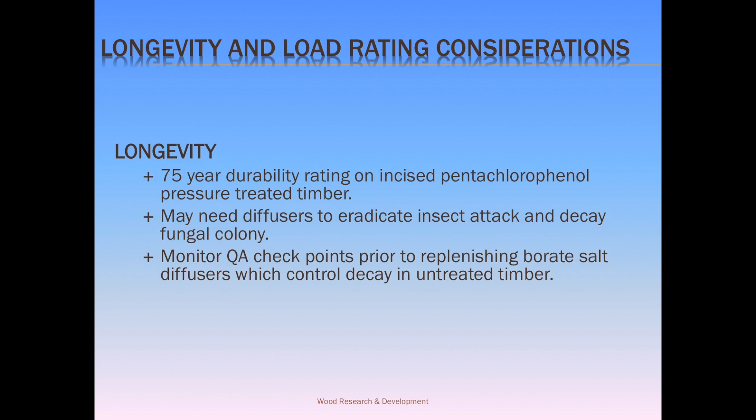Longevity. We say timber doesn't last. That's the mantra. Timber doesn't last. But I tell my students, I say, wait now, we've said timber doesn't last, but the average age of a bridge in America is 82 years. What's the average age of a concrete bridge? 42. So timber doesn't last.

We say timber doesn't last, but timber is the biggest sequestered carbon block in the world today in our homes in North America. The biggest sequestered carbon block in the world is our homes, because they're all stick built. So you see, really, it's about not knowing, isn't it? When you don't know, you don't know. And that's the simple of that. So we have this diffuser opportunity to extend life. We have monitor control checkpoints to check them regularly at the ground, what we call hot zones, and that allows us to extend life.

And this is the big one for me. 22 times less energy to build a timber structure than a steel structure. 22 times less energy. 16 times less than our reinforced concrete. And timber is so great because what? The trees are renewable and they pull CO2 out of the air. It's our roots, see? Timber's in our roots. Simple. So that's the way we roll.

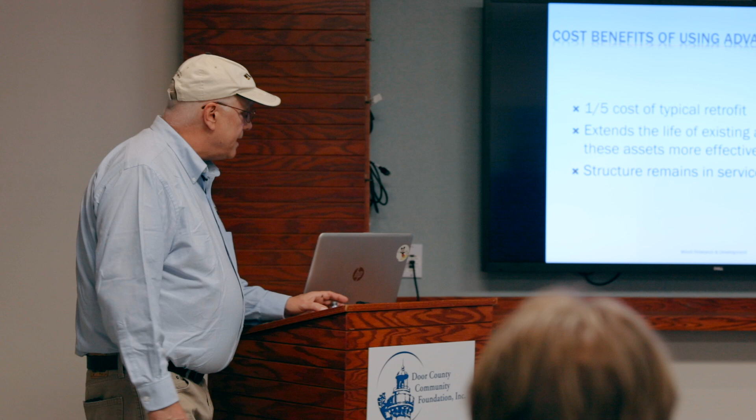A fifth the cost typically to retrofit. A fifth the cost. I'm not telling you what this costs yet. It's going to be the end. You got to stay. You'll be really sick of me by the end of it.

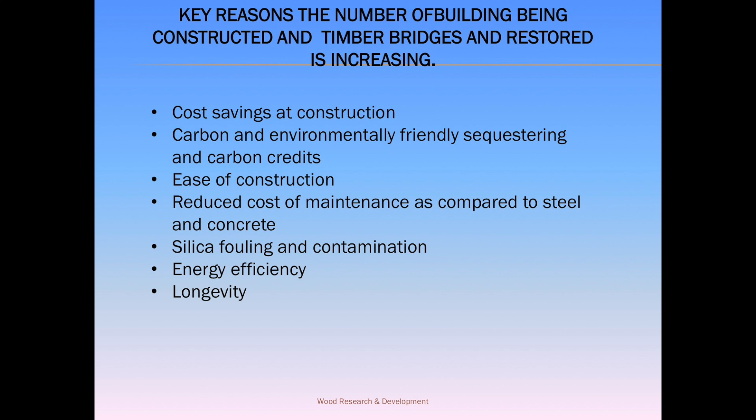You see here. So we got a summary. Cost savings at construction. Carbon, environmentally friendly. Ease of construction to fix it. Reduced cost of maintenance downstream. These are the reasons today that we're seeing buildings and bridges be restored and built with timber.

The average moisture content in a bridge or an outdoor structure in this country is 13 to 14% or 16%. Wood does not decay until it hits 22%. Why is decay 82% of all timber structure degradation? It's the connectors. It's where it's connected.

And one of the great things about the tower is all of the guy wires that are there are fastened to the piles with hoops that go around the column. When I looked at that in the picture, I said right away, gee, what a blessing that is. Because oftentimes they go straight through the column and the water goes in that and gets in the middle. And these have hoops. Another reason the tower is still in great condition today. You see, there's a reason for everything. And if you understand those reasons, you'll be better at your job.

And so this species that we have here in the columns is called Western red cedar. It's 0.33. It's 1/3 the density of water. It's very low density. Not as known for its strength. What's it known for? Longevity. They could have had white pine from local, but they chose Western red cedar. Why? Because white pine hasn't got near the longevity that Western red cedar has.

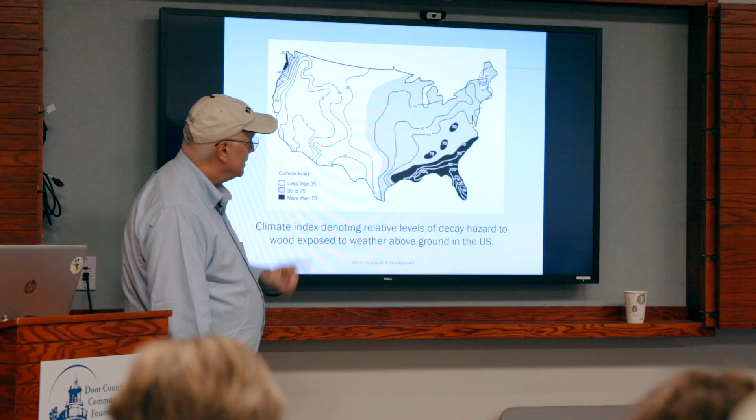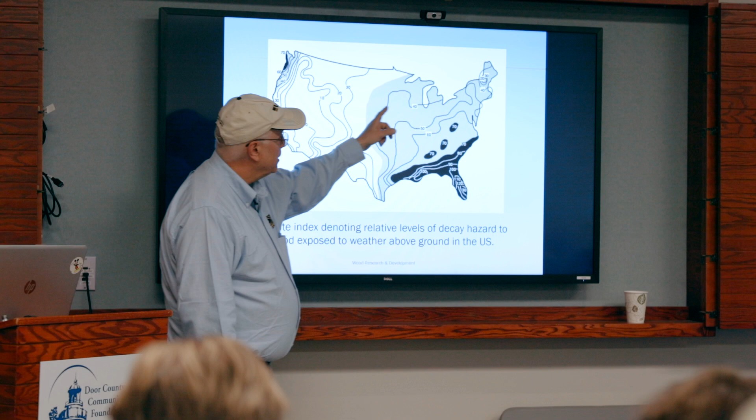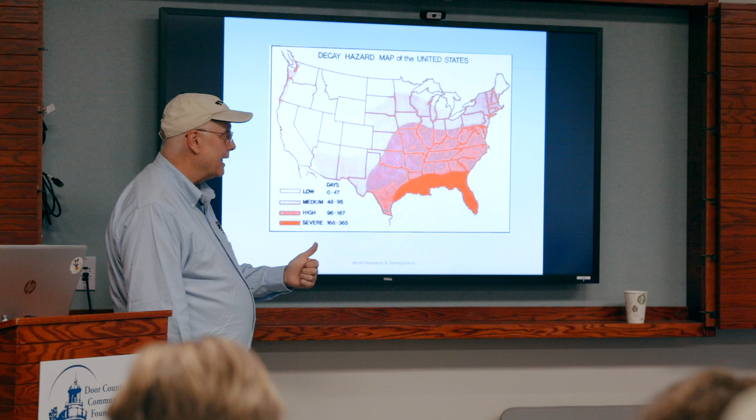This tower, what would I do with this tower? So here comes this tower. Look, 1929, 1931, built, $500. Can you imagine building that tower for $500 today? Money was hard to come by in those days, and the tower represented a great way forward for the people in a community as it provided a way to look out over the beauty of the land beyond all obstacles. If you were going through the Great Depression, to be able to get up a tower and look at distance would have been a great blessing. Because your problems would have been crowding you pretty bad, wouldn't they?

And so to be free to see and to dream, much the same way as the people of the day gained strength. The engineers don't like to read this stuff. I know they don't, but I like to put it in there. I'm a sucker for timber. So people gained strength to face the day, face the future, seeing how things would go beyond the days of the Great Depression. The community persevered through world wars, economic booms, busts, as the country grew. During all this time, the tower also persevered. No maintenance, poor maintenance, you name it, it persevered. It stood the test of time.

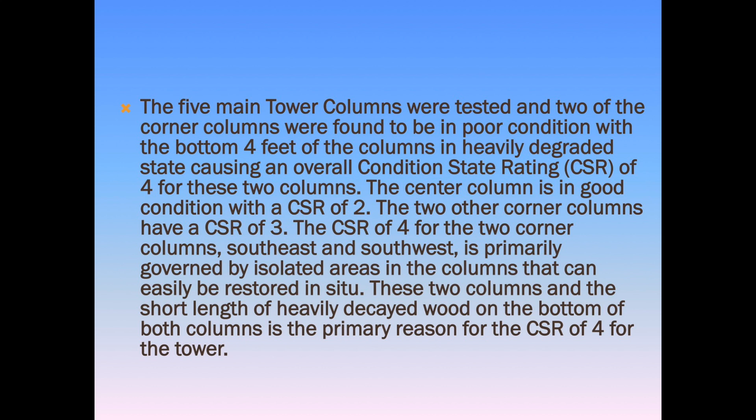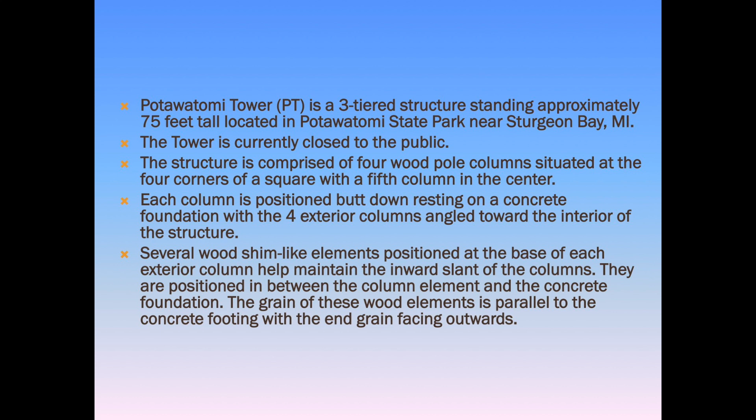It's a 3-tiered structure standing approximately 75 feet. The tower is closed to public right now, as I found out today. The structure is comprised of 4 wood columns that were not randomly picked. They were not sawn. They were round. They were cedar. They knew what they were doing. It was chosen for a reason. They had collars that went around them, not through them. They did it for a reason. They chose white oak treads for a reason. The tower just didn't happen by accident. It was there for a reason. That's why it's here today.

And underneath each of the column corners, there's shims to make it point inward. The one in the center is lifted up to let it breathe. The stairs wrap around the central wood column to provide access to 3 observation levels, the first at 25, then 50, and the 75. The top observation level is open with handrails and used as a viewing platform. The tower is located in the top of Government Bluff limestone quarry. It provides excellent views of the state park in the state of Wisconsin.

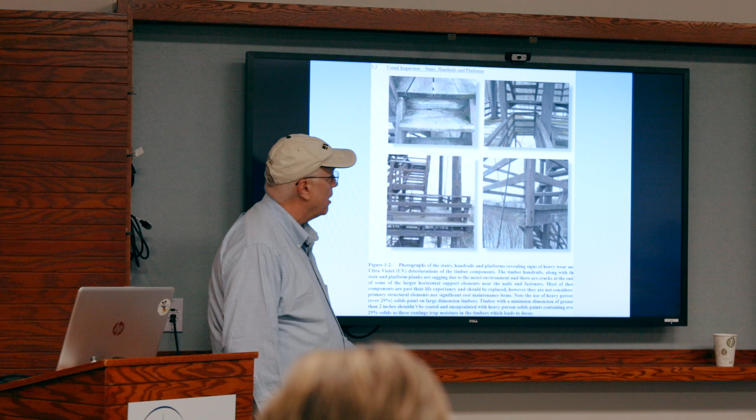So we look at it here, you'll see photographs of stairs and handrails in here. You can see them by looking through here. Some of them painted. The outside corners on the stair rail kind of settling. You can see some of these guys getting decay. You can see the verticals in here. These sorts of fix-ups in any tower are called minor maintenance. As you can see in here, here's the collars instead of going through them with the guy wires. You can see they painted it, wouldn't have done it.

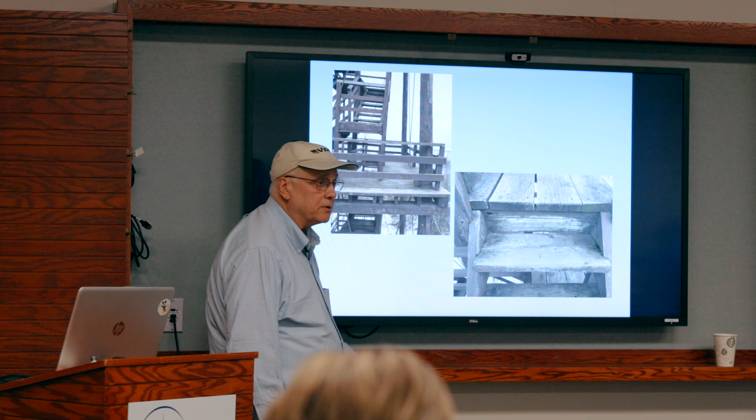When I had my way, I'd walnut shell blast it or acrylic bead blast it and then stain it with a stain less than 28% solids, Cetol 1 and then Cetol 23, and that wood would brighten up and you guys would have to put sunglasses on when you're around it. It would be beautiful.

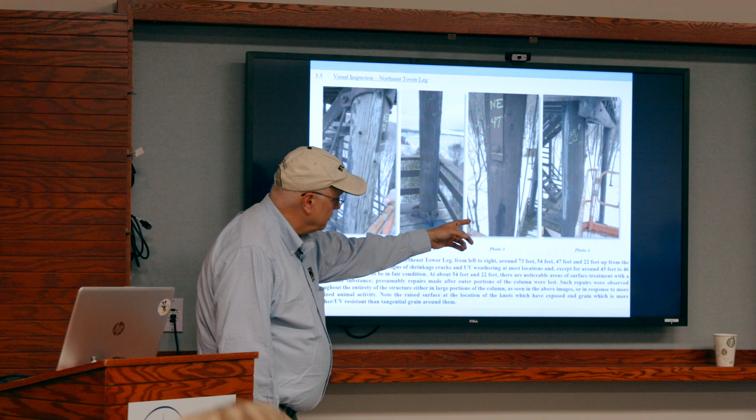As you can see here, you look at that and you say, that guy's had it. There's some UV weathering there. It's kind of lost some section around the knots. It's got some shrinkage cracks around it. It kind of looks old. And the first thing you think of is toast. When we do the internal non-destructive testing, it isn't toast. And so you can see there are places that are toast. My little girl could pick that one out. I don't have to be a rocket scientist to figure that one. But these decks and rails and systems can be easily restored. It's not a big bill. And we can take that plywood down.

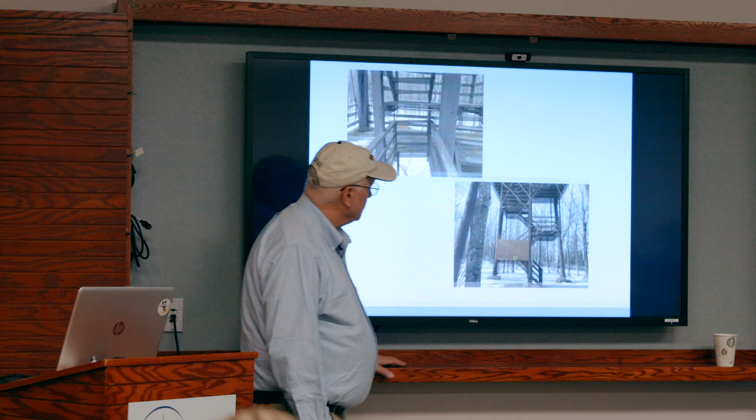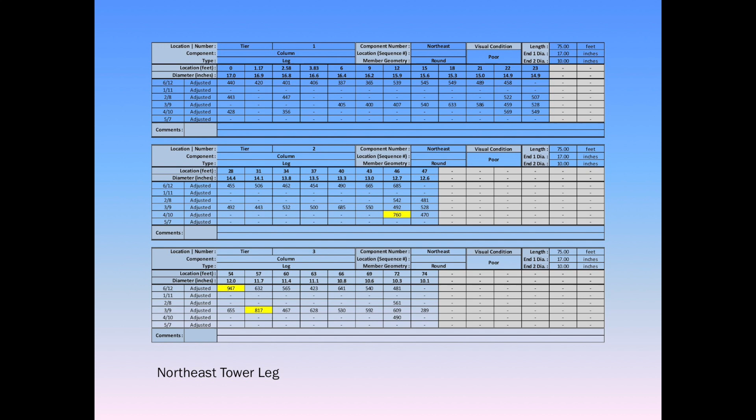And you can see here the big 4 columns going. Look at that, guys. Now you know why I went through the first of it, didn't you? But you're thinking, this guy sucks. He put me through all these damn slides. What's he up to? I want to go home and feed the cat. You're like, come on, what's wrong here? Look, this is it. Now you know. When you looked at the previous ones, all the reds and yellows, there's no reds and yellows. That's what I'm saying.

But look at that. Come on, man. Yeah, there's a bad guy right here, but he's isolated. You can get him. Look, there's some at the corner. Look here, but very few yellows. Yeah, you can fix. Look, they put tar on it. I don't know if some of you guys are responsible for that. I'd never have done it, and I'd get it out. Let the wood breathe. Don't coat it. Don't tar it. Let it breathe.

I say to my wife all the time, when I'm on one Saturday and I want to work out in the shop, I say, let me breathe. She'll come out and say, I got this big list for you. I haven't seen you for a week. I want to do this, this, and that. I said, honey, come on, I got to be able to breathe here for a minute.

That's what this wood does. It needs to be able to breathe. Look, a few reds.

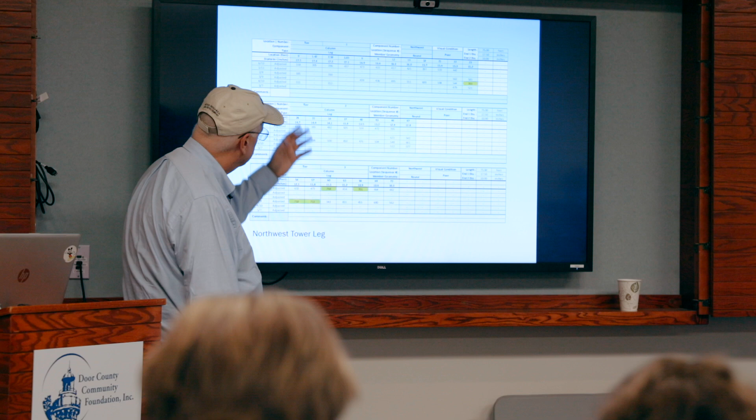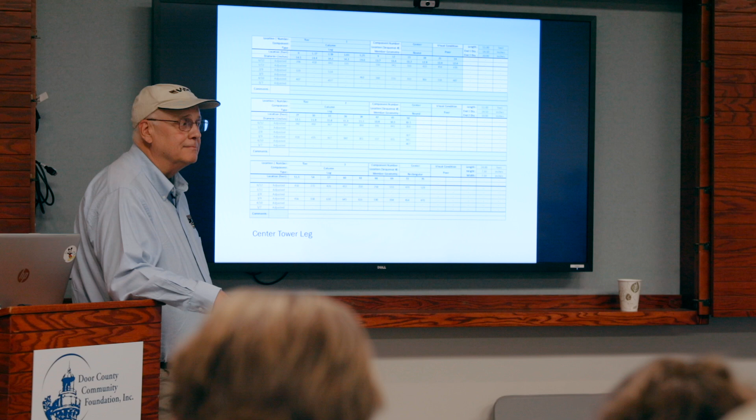These guys here, you're looking at them and seeing this and you're knowing why it's got, look. Northwest tower. You know, that's it. Look at that one. The center tower leg has no decay in it. The one they singled out. Cut it out. None. There's no decay in it. Why is it shut down?

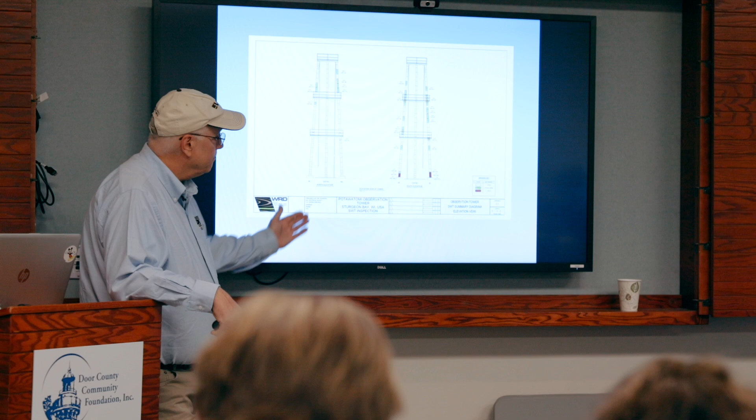It's got a few weak links, right? It's that analogy I told you, right? You're hanging from the steel chain. Don't take the average, you got to take the least. But go fix that steel link and then hang from it. See here? That's what it's done when you put it graphically and we drew it out. You can see right off where the bad ones are, right? Go fix them.

So analysis of cores revealed specific gravity. That's the ratio of density of wood to density of water. It was Western red cedar, highly durable, as you can see here. These southeast columns, they got some voids in there, which we found. And as you can see, this tower can go the distance to be able to be restored. This is the cores the guys took from it. So we know what we're doing.

We identified them under microscope and followed the proper keys to identify the species and its grade, and put together an in-kind repair strategy like this for the element. This is an advanced fiber. We gave a couple of options. And here is the design. Hot off the press today. I was over there working at the B&B, putting this into the PowerPoint an hour before tonight. So nothing like just-in-time strategy.

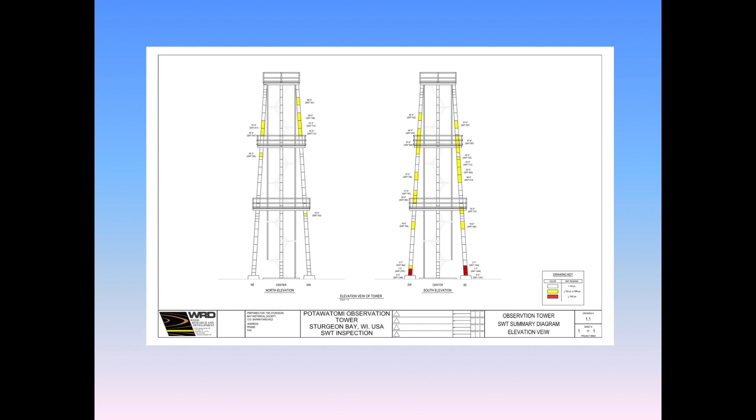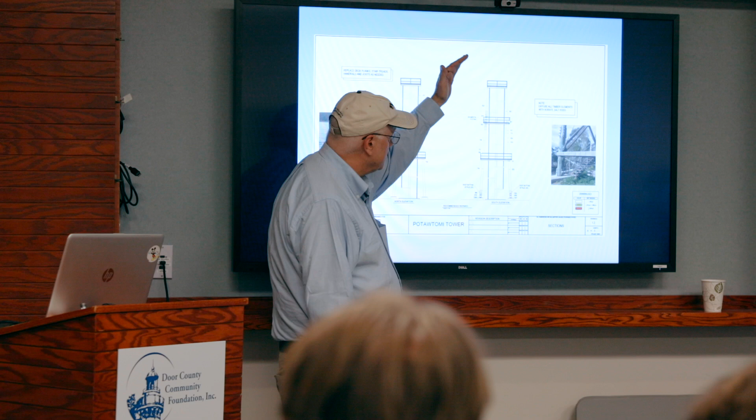You can see this is the specifications page. This is the replacement requirements page here. You can see this is the drawing showing the posting detail here. We'll take care of this guy here with a typical posting detail where the reds are. How do we do that? We support the tower with guy wires. We then turn around and cut it, put in another one. There's a specific design characteristic. You see that space in there underneath it? And we'll post that piece.

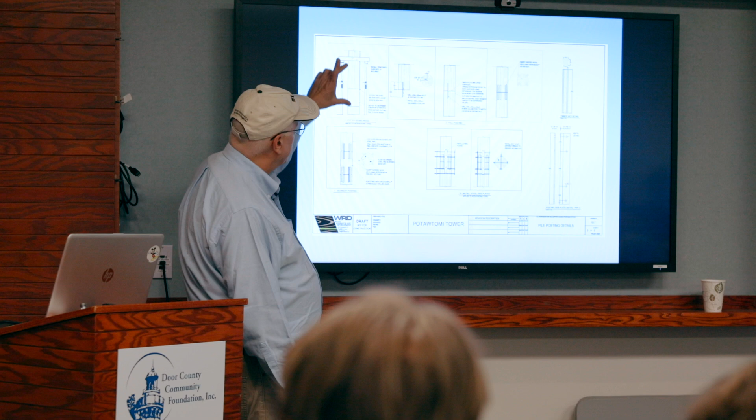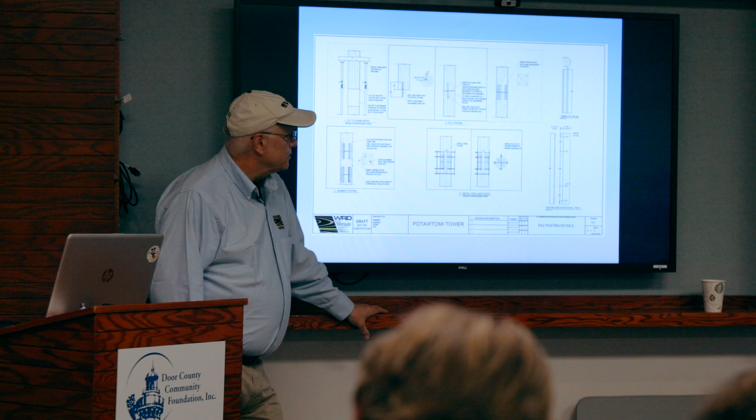You can see samples here. And this shows you how it's done. We hold that column up. Then we take a section out, put another section of Western red cedar in with a specific design detail here, and put it in action. Now, if you've never had any training in timber design, you probably won't know what to do here. But I've got the odd one done. 1,350 to be exact. So you can see here, this is the cost.

You're seeing it for the first time. Not even your buddy Sean has seen this. I can't see it. You can't see it. That's what my wife says all the time. Okay, look.

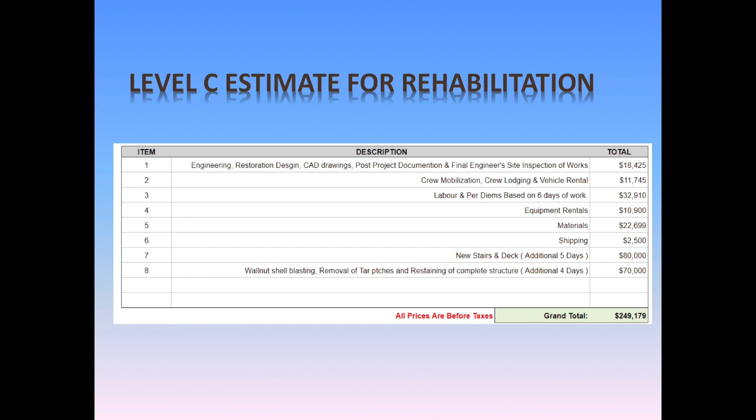249,000. You see here. And this is what? Here, walnut shell blasting. If you want it structurally sound to be able to walk up that stairs, then you're talking 170. If you want to fix the columns to keep it from coming down, it's less than 100,000. Eagle was 750. When you know where the bad actors are, you can fix them at much lower cost. Understanding the situation is part of curing the situation.

So no fibers, none of that? I just chose one that I thought was holistic for you. Okay. I didn't put fibers on it. I figured on using kind for kind, sectioning and splicing, natural. If you want to see fibers, they'll be a little cheaper. But I figure when you got it this low, you might as well have it the way, right? Okay. Yeah. So you can see this is one, same height.

So I thought I'd show you one that I inspected, designed, went and fixed. It's the same height. Does that sound good to you? Four-legged stool, still the same. Taking pieces out of it. Let's look at it here. Finding the reds. Look. What did they do with their guy wire or their bracing? Went through it, and it ruined it. You guys have collars around it. And so you can see that guy's bad. Well, we're going to take that guy out.

And you can see we put guy wires to hold it for safety, to keep the tower from coming down. And they had engineers come in and say, let's put concrete around the bottom of it to restore it. And they floated concrete around the bottom. It's the kiss of death. They go away 66% faster. So we had to jackhammer the concrete out, and then get at the stirrups from the old base.

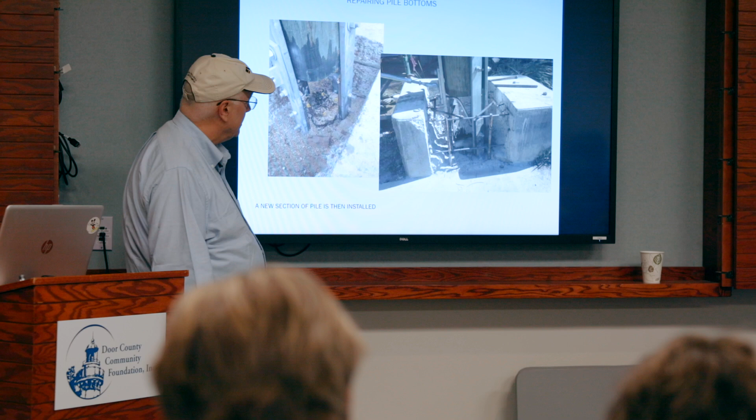And there's the old one in here with the old stirrups. We connected the new stirrups to the old one, cut out the old one. You can see it here now connected and the concrete cut away from it. You can see these guys. Here's the new pile segment that was changed out for the bottom, put in place here. You can see it here.

The concrete floated around, and the engineer of record for the council came around. He said, "Dan, too bad. Your pile was too short. I always tell you to measure twice and cut once." And I'm saying, "What? Measure twice and cut once? What are you talking about?" He said, "Well, look, you got an inch too short."

I'm an inch too short? I said, "I planned it that way because I want the air underneath it so that the moisture doesn't come from the concrete and ruin it again." Like your what? Center column in your tower. And so here it is. You can see it fixed up.

This is an internal shear pin. It's inside, so you can't see it. This is the outside. That's a rotation spline glued into it. You can see there. And basically, we put that back in service. Do you remember what it looked like? Hold on. Whoop, right there. This is it. Okay, come.

So we still have the bolts going in there? Yeah, those nasty bolts. I know. They're still there, huh? Yeah. And not rusted either. But anyway, you got that piece back. And there it is. That guy goes away. Look how bad he is.

I mean, most engineers look at this and condemn the whole tower. Because they don't want to face it. They don't know how to face it. They just want to get rid of the tower. Hey, what? Wood doesn't last, right? Isn't that what you've heard? So it's easy to tell a client wood doesn't last when you're showing them that, because he just believes you right away. It's a lot harder to fix it like that. Yeah, or dry rot, exactly.

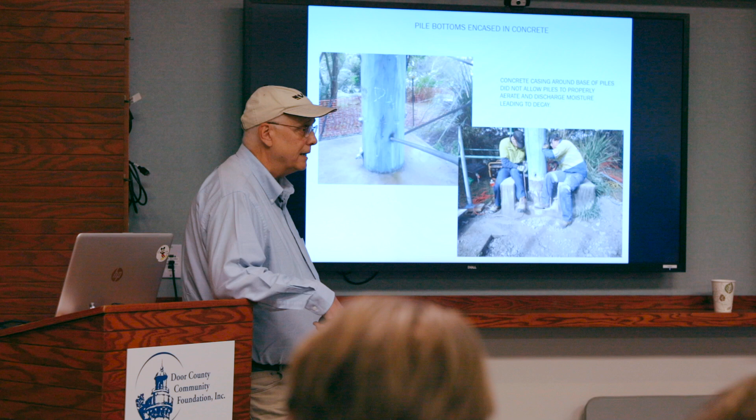And you can see what he did here. This is the next one. I already told them that the other two columns that are buried in concrete are going to be up next, because they've been ruined. So we put diffusers in to try and extend them, but down in here, it's not going to work. And so you see here, we don't have the guy wires going through. They're horizontal lagged in and sealed, and this is a hook here to carry the new cross brace. New timbers inserted into it.

And these guys here, you see them all over. They put Malthoid on the top. Get rid of those and don't paint it. Get rid of the paint. So we got rid of those. Put copper naphthenate, 2% reactive agent, heavy saturation 3 times, then Anchorseal, which is paraffin wax and water, and get rid of that metal. Because every day at temperature change, that metal sweats. And fix these where they're at in situ and put this thing back in service.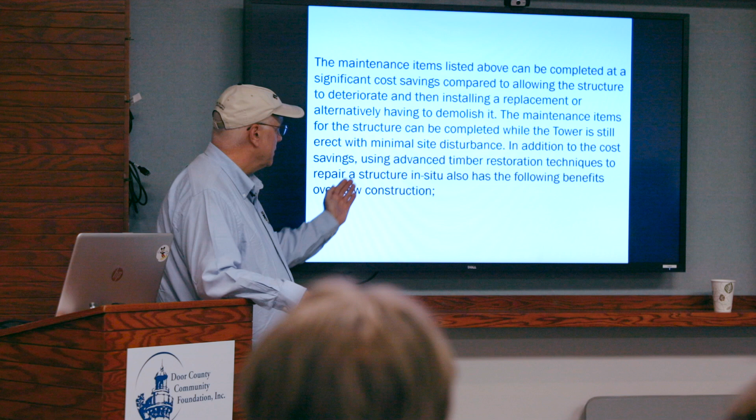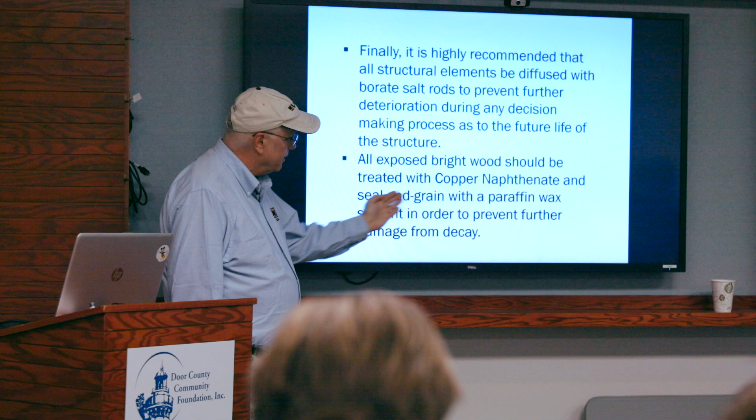The maintenance items listed above can be completed at significant cost savings. That's what I talk about here with the tower, now back to your tower. In addition to the cost savings, using advanced timber restoration techniques, repair of the structure gives benefits: reduced site disturbance, reduced potential for erosion, preserves the landmark for the community, extends the life of existing assets, and utilizes these assets more effectively. Finally, it's highly recommended that all structural elements be diffused to extend the life. Exposed bright wood should be treated with copper naphthenate, and the end grain sealed with Anchorseal.

In summary, Potawatomi Tower has stood the test of time for nearly 90 years. It is weathered and contains conventional UV section loss as well as non-structural cracks and splits in some of the elements. The tower has 2 columns with advanced decay and cavities in the bottom 4 feet. However, well over 90% of the critical structural elements are capable of continuing in service to the community with the help of remedial treatments that can be implemented as the tower stands. It has served the community for decades and deserves the opportunity to continue to do so.

The cost of remedial work is a fraction of the cost of replacement. The cost of tearing it down and disposing of the tower will be the same magnitude as repairing the worst of the heavily degraded zones. The best option going forward is to restore the tower and extend its life utilizing advanced strategies. Advanced non-destructive testing and assay sampling by an IAS-certified test laboratory has shown that the vast majority of the primary structural elements are in a condition suitable for continued service. Proper maintenance will extend the life. Proper repairs will bring the structure back to proper occupancy capacity. With these actions, the Potawatomi Tower can go on to serve the community for another 90 years.

There I am. Thank you. Rewind.